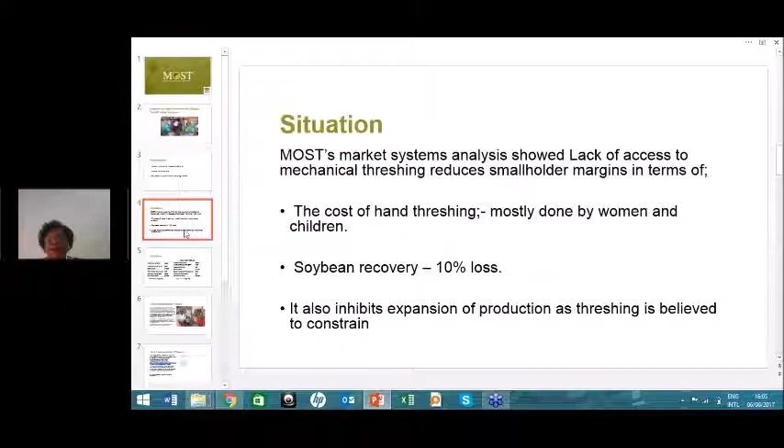But also we discovered that there's a lot of soybean that is lost when people are using manual threshing, about 10% of the soybean. Okay, so because of that, we also discovered that a lot of people are not really investing in the production of soybean because of the constraint that they are having as far as manual threshing of soybean is concerned.

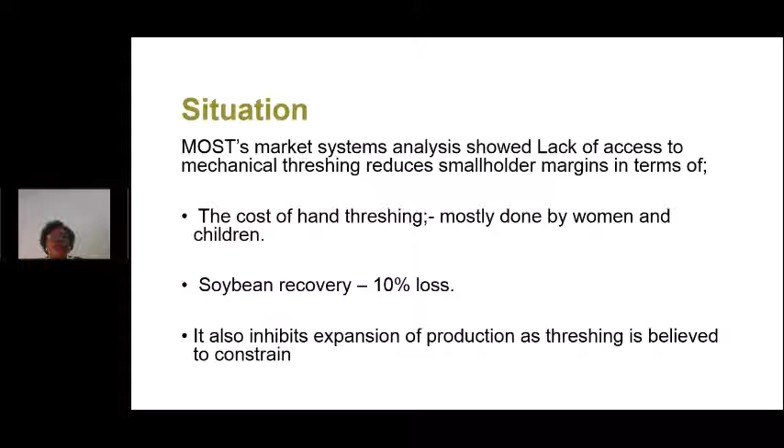So we looked at what would change if we introduced mechanized soya threshing among the smallholders in Malawi. Generally, on the 0.4 hectare of land, the smallholders can get about 400 kgs, and the average selling price of soya at the moment is about 35 cents.

The current income is about $140 for a smallholder farmer. The cost of manual threshing per kg is about 0.07 cents, which accumulates to about $28 when they are using manual threshing. The net income to the farmer is about $112.

But once this is mechanized, we saw a very big difference. The farmer would normally get 400 kgs, but because they are now using mechanized threshing, there's an additional 40 kgs of soya that they would get. At the same average price, the net income is increased to 152.

The cost of shelling per kg is about 0.05 cents, which gives the farmer the cost of all the manual labor at about $22. When you compare the two, the net income to the farmer doing manual threshing is less than the farmer doing mechanized threshing.

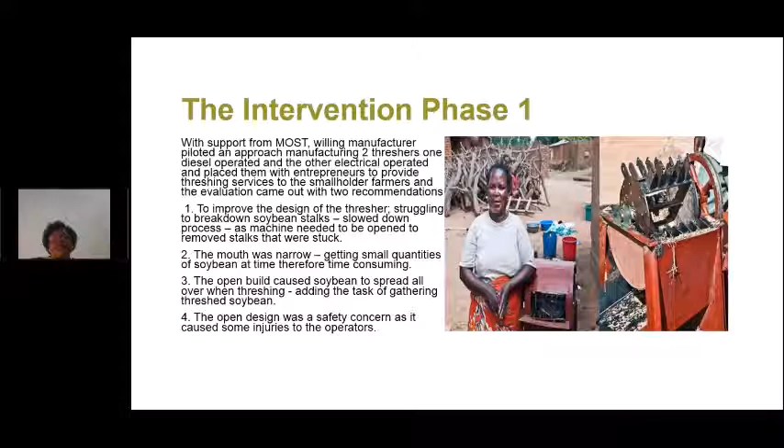So as a program, we took this feedback and looked at it, and then we decided to engage an engineer to look at the design and improve it, taking into consideration all the challenges the smallholder farmers were facing.

So the engineer did the design to improve on the thresher, and we have the manual on the MOST website that anybody can download and use to manufacture a soya thresher if need be.

So in phase 2, what we did was to identify two more companies that were able to manufacture the threshers. Each company was tasked to manufacture 3 threshers, and the 6 threshers were placed with 6 entrepreneurs.

This time, what we really wanted to establish was a business model that entrepreneurs can use to provide threshing services to smallholder farmers. So after phase 2 of the intervention, the evaluation also came up with 2 outcomes.

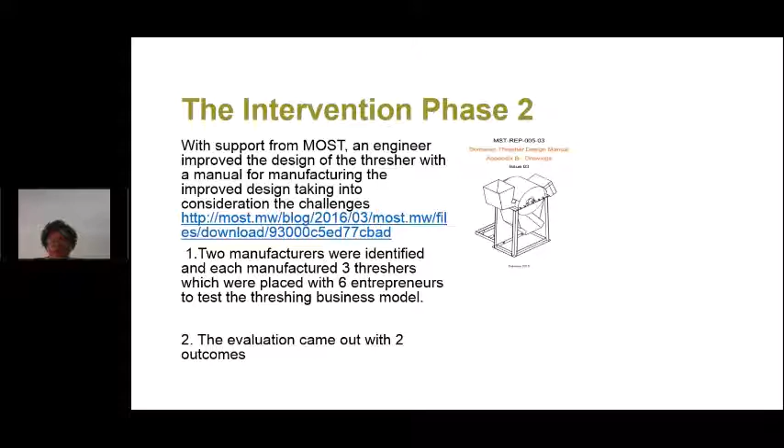So what you see in the picture is the revised soya threshing machine that the two manufacturers we had identified were able to produce and place with the smallholder farmers.

So when we had put the threshers with the entrepreneurs, we asked them to collect specific data that would help produce a business model that anybody wanting to invest in soya threshing as a business could use.

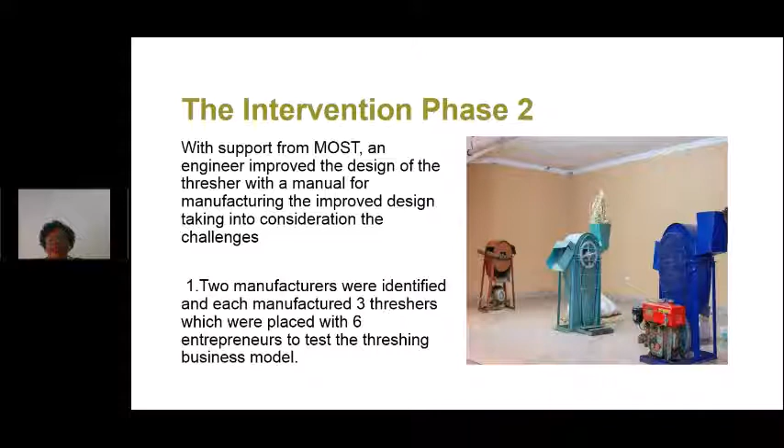But they also came up with some other recommendations after testing the threshers on the market. In Malawi, the soybean harvest and sales window normally takes about 45 days—this is the time people harvest the soya and take it to market—so it's a process that has to be done very quickly.

Now, with the threshers that came on the market, the entrepreneurs discovered that the speed of the threshers was not fast enough, because they needed to service one smallholder or a number of smallholders in a day so that they could service more within the harvesting period.

Where people had booked the entrepreneur to come and thresh their soya, if the entrepreneur was taking long because he was servicing another smallholder, the smallholders would turn back to manual threshing because they wanted to thresh their soya as quickly as possible. So the entrepreneurs came with other modification suggestions for the thresher.

So they suggested that the mouth of the thresher should be made wider so that they can push more volumes of soya in a given time, so they're able to serve more farmers and at the same time reduce the cost of threshing per kg. To them, they would want to maximize profit, but we're also looking at it that if they're able to charge a smallholder farmer a reduced fee for threshing, then the smallholder farmer would also benefit from the reduced cost of threshing per kg.

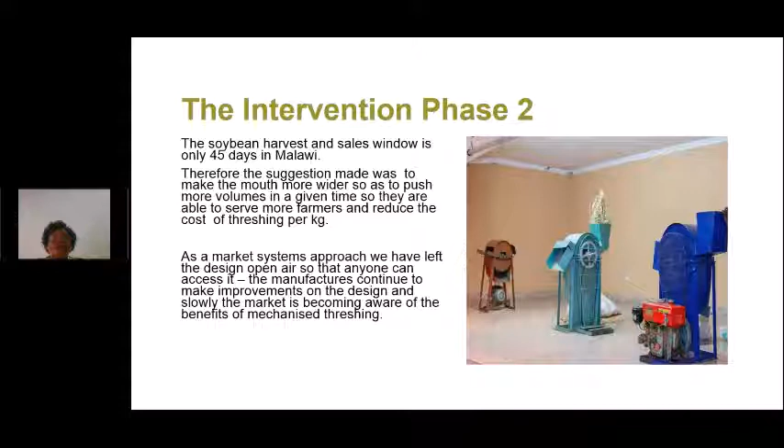So that's what I had. But another thing that's making the commercialization of soybean a big, important intervention in Malawi is the fact that it is mainly women and children involved in manual threshing of soybean. Now, with the introduction of mechanized threshing, most of the women are appreciating that it's really taking away the burden of manual threshing from them, because that is a lot of hard work.

But it's also releasing some time that they have to do other things. The time they would have spent manually threshing the soya, now they can use that time to do other things. So that's another thing we are also seeing as an advantage of mechanized threshing.

At the same time, when they are doing manual threshing, they are limited in terms of the amount of soya they can beat, but at the same time they can also clean by winnowing. The winnowing is mainly done by women in Malawi. So where the soya is done manually, the women would have a limited amount of soya.

Normally, they would charge about 500 kwacha, which is about $0.75 for a 50 kg bag. And in a day, if they are using manual threshing, they can thresh about 7 bags. But with mechanized threshing, they are finding there is more soya for them to winnow in a day. So in a day, 2 women can winnow about 20 bags of soya, which really gives them a lot of money in terms of income.

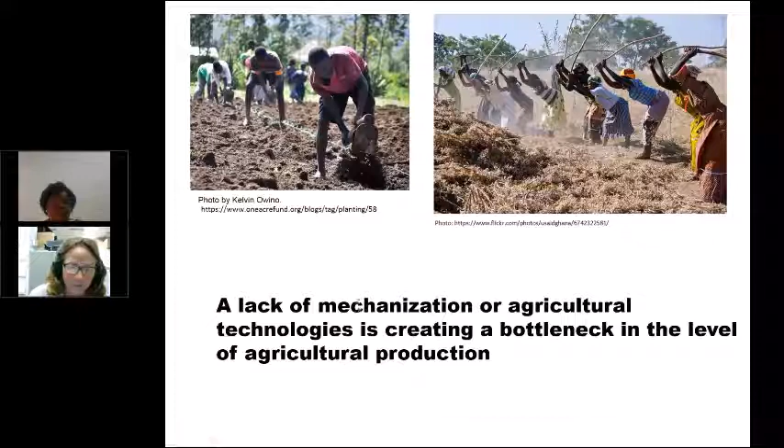So the Soybean Innovation Lab's objectives include bringing about change in a variety of ways, including recognizing the importance of mechanization and intensifying agricultural production. So we would like to develop new sources of farm machinery that are more suitable for African conditions, while focusing on environmentally sustainable mechanization.

So we've decided to start with threshers because, although like in the poll, many of you mentioned that planters are also important, it's going to take a little bit longer to match up conservation agricultural research with new forms of planting mechanization.

We also feel that threshers eventually need to address issues of organic matter retention, where the crop residue stays in the field. We're working on sustainable business models, including gender equity, building up public-private partnerships, and increasing in-country capacity development.

So the biggest issue as we began to embark on a program of mechanization at the Soybean Innovation Lab was, how do we prevent adding to the equipment graveyard problem? Because many of you guys who live and work in Africa know that many times equipment gets imported to countries where there is not either parts available or the knowledge on how to fix the equipment.

So as we work on mechanization programs, we need to always keep in mind that we don't want to add to the problem.

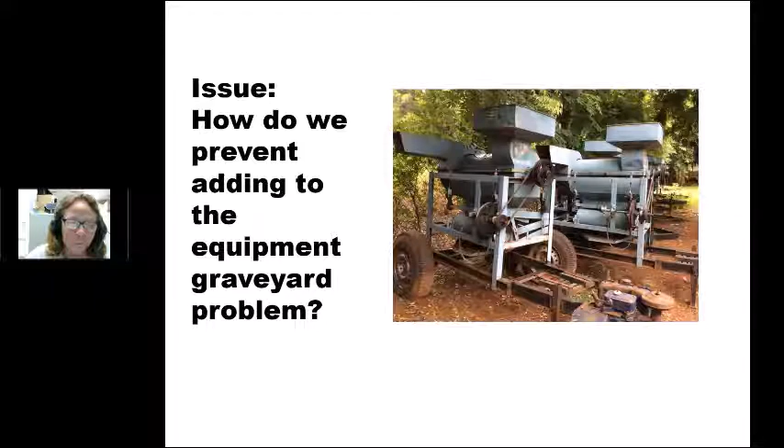So one of the things that we came across early on in our project was this women's group in Bulenga, Ghana, who on their own had a blacksmith in a nearby larger town build a soybean thresher that the women helped design and come up with the specifications for. This thresher was built for a cost of about 750 cedis, which is $250.

There's a couple reasons that the thresher was so inexpensive. One, all the metal is fairly thin, probably not quite durable enough, and recycled metal. Many of the parts were recycled.

But what this did show us was that there is the capability for local blacksmiths to build threshers, and there was also the desire amongst female soybean growers to use and build and pay for threshers.

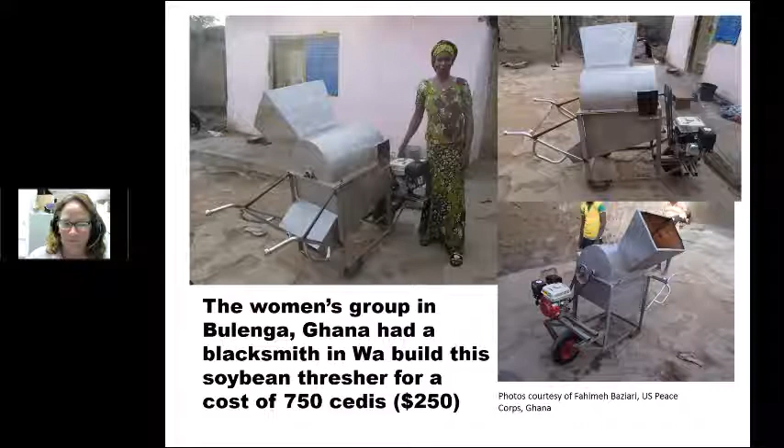So that led to our strategy, which is that we want to create designs that can be built, modified, and repaired locally. So in this case, locally is the key thing.

So we wanted to start with threshers because of post-harvest loss and the drudgery issues involved with manual threshing, or hand harvest and threshing. We wanted to create a well-functioning prototype, and then we wanted to train local blacksmiths in its production.

And then, in addition to training those blacksmiths, we wanted to assist them in building businesses through education and networking. And then we also wanted to field test the designs with local farmers, which we did with existing women's groups. So our first design was geared towards small groups of women, and we built a fairly small thresher, thinking that a smaller thresher would be more affordable for just a few women.

Once we got these out into the villages, what we found was that the design was too small for multiple users, too expensive for just a few farmers. It had about $1,000 cost, with the engine being half the cost. We also found that women preferred to hire a male operator, and that male operator needed a larger capacity thresher for him to be profitable as an operator.

There were also issues with unfamiliarity with engines and mechanization, which led to problems with use. So we definitely discovered that not giving proper training, or not extensive enough training in its use, its maintenance, and its repair would lead to the thresher becoming part of the equipment graveyard problem. Most of the users that we experimented with also stated that they thought a multi-crop thresher would be a better thing for their needs.

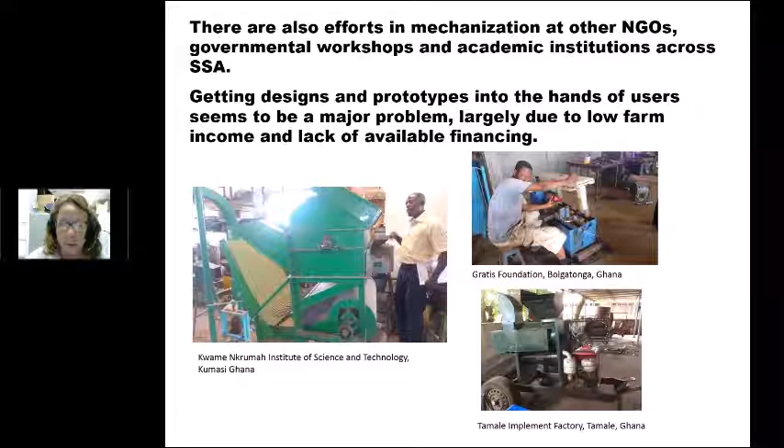Additionally, there's a large collective of local artisans and welders who are working in agricultural mechanization. And I don't think this is just true in Ghana. I think this is probably true all over sub-Saharan Africa, because as we publicize our mechanization program, we have had people say, we'd like to buy one of your threshers and move it to Kenya or Ivory Coast or various places.

And I feel that what would be best done is that we train people in your areas to build these threshers rather than importing them from one place to the other, because we do need trained thresher fabricators and repair people all over sub-Saharan Africa to make these thresher programs viable and to keep these threshers from ending up in equipment graveyards.

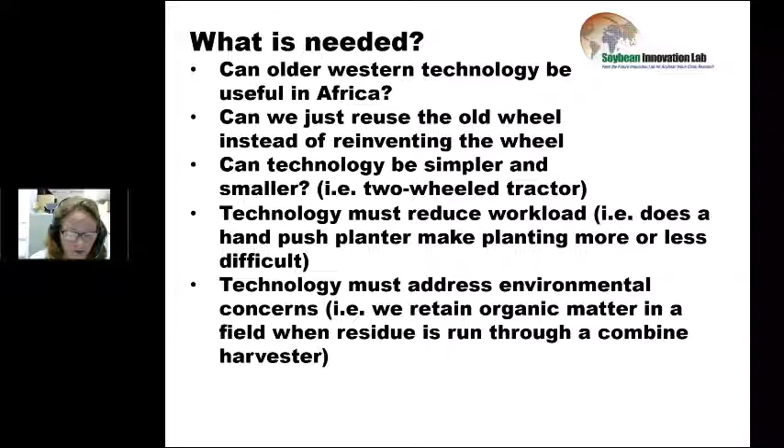So finally, the Soybean Innovation Lab would like to partner with other organizations to address these issues, to address the issue of minimal access to affordable and useful mechanization that stifles agricultural intensification. Finally, we're developing a Mechanization Network, where groups and individuals working on ag tech can interact and share ideas and designs, and that's going to be part of your exit questions if you would like to join our Mechanization Network, so that we can keep the dialogue going amongst groups that are working on this, know how the field testing is working out, know how each different design is affecting costs and benefits to farmers.